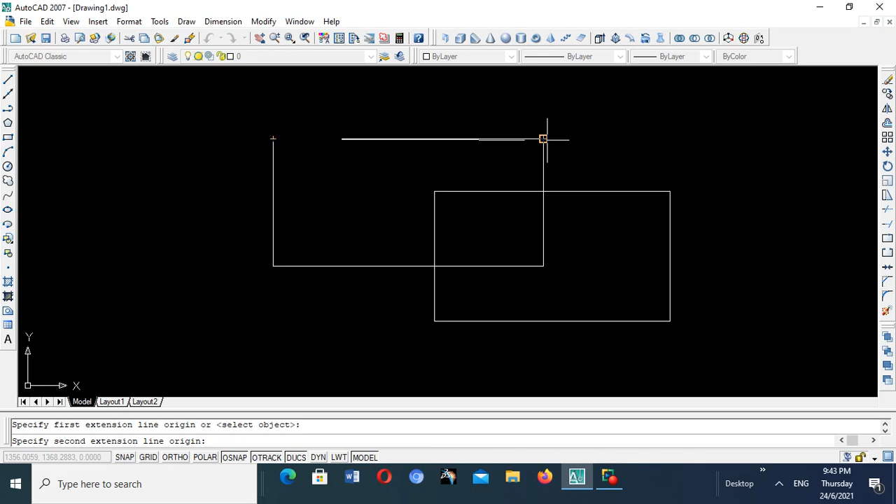When you are dimensioning, you pick this drop-down menu and choose if you want to dimension between a line. Go to its edges, click on linear, and click on the end of the line, two ends, and there is your dimension. See, it's very small. Then if you want to dimension the height, go again on dimension linear, click on the end points of the line. There is your dimension. Very easy.

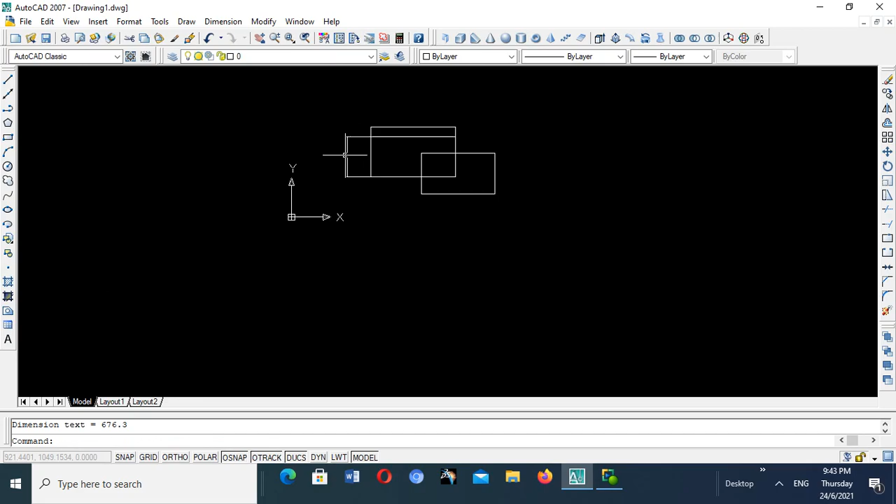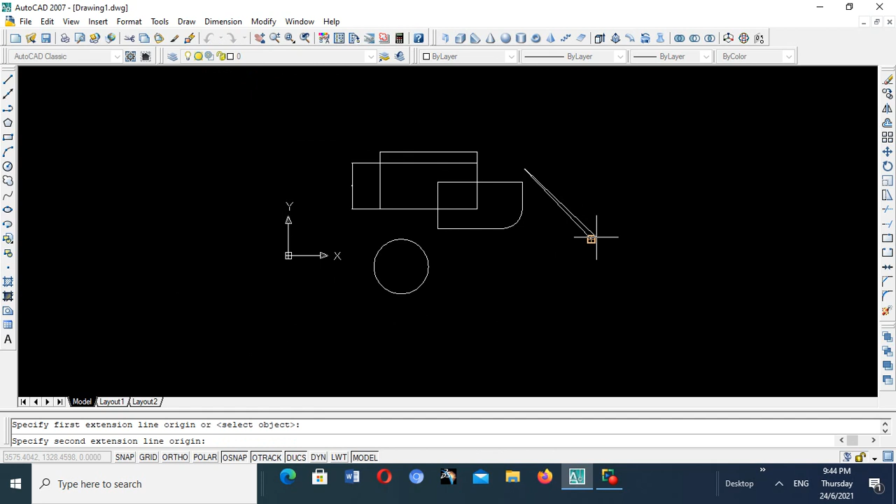So if you want to dimension a non-horizontal line which is inclined like this one, you go to dimension, click on aligned, and then click the end points of the aligned dimension. There is your dimension. See, you have to zoom it to see it, it's a bit small. There's something I want to teach you later.

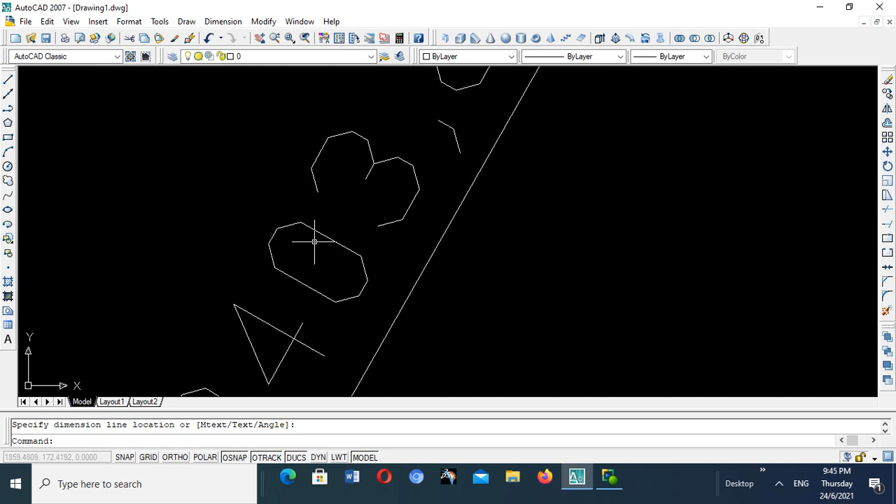If you want to dimension a circle, you go to dimension. You can get its radius, you can get its diameter, you can get its radius. So click radius, then click on the circle. There is your radius. You want to dimension the fillet radius - again you click radius, this is it. There is your radius, 300.

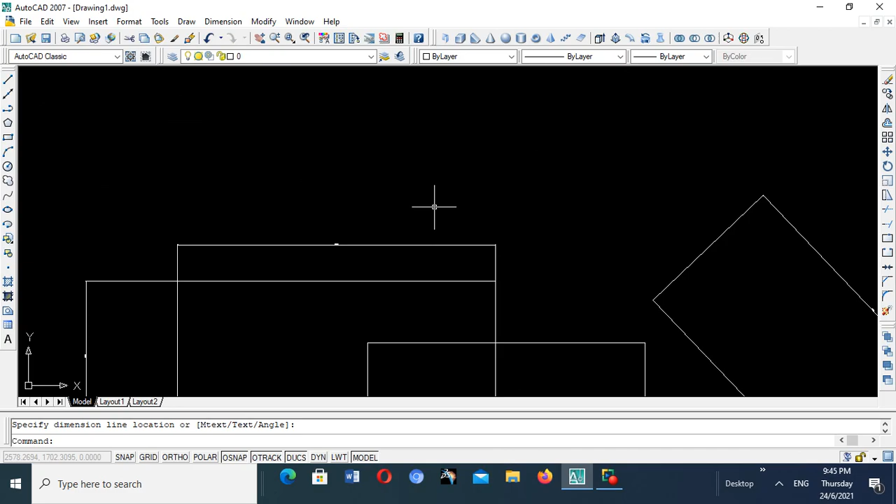Remember, we dimensioned 300. But now you might not be satisfied with this dimension - particularly the text might be too small, the arrowheads might not be visible, the extension lines at the edge might be too close. See, there's a distance. You want to increase the gap between the end point and the dimension end line.

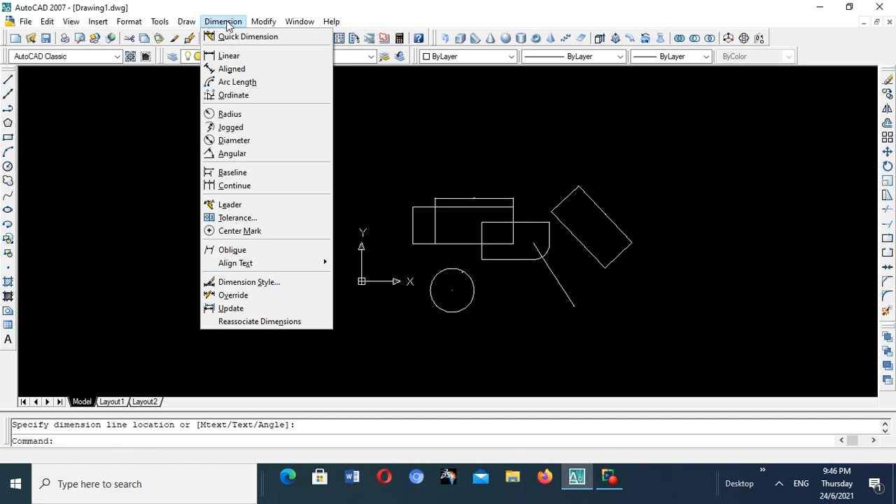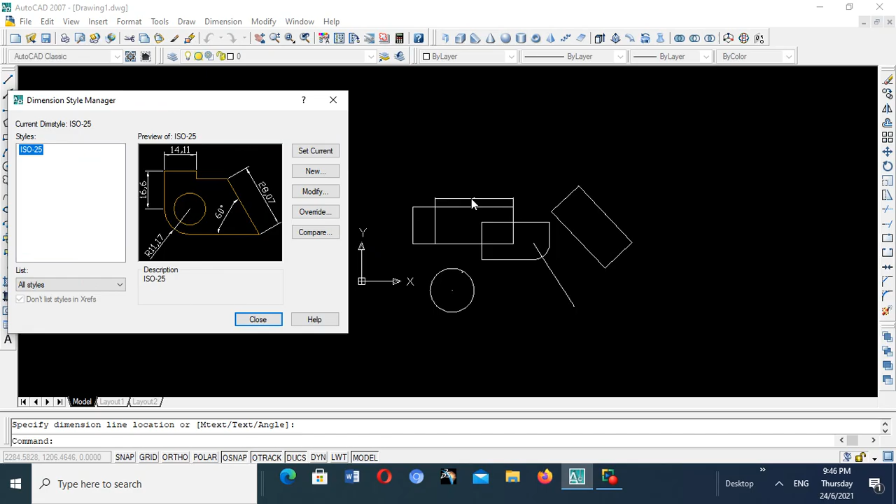So you go to modify, then dimension, then dimension style. Here you will see we can modify certain things like the size of the dimension, the size of the arrowhead, the different aspects of dimension, line thickness. We can modify it, and you will see after our modification there will be a difference in the dimension parameters of our drawings. You click on modify, then here you can modify line, arrows and symbols, text, fit, primary units, alternate unit, tolerances.

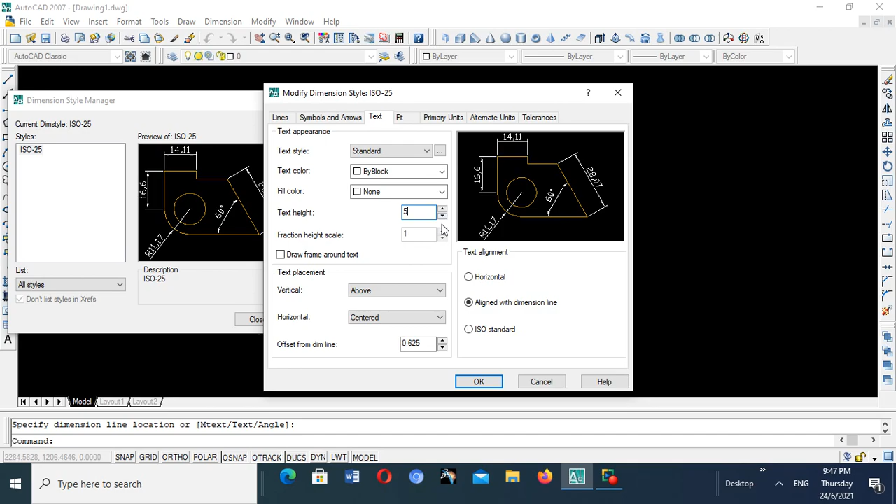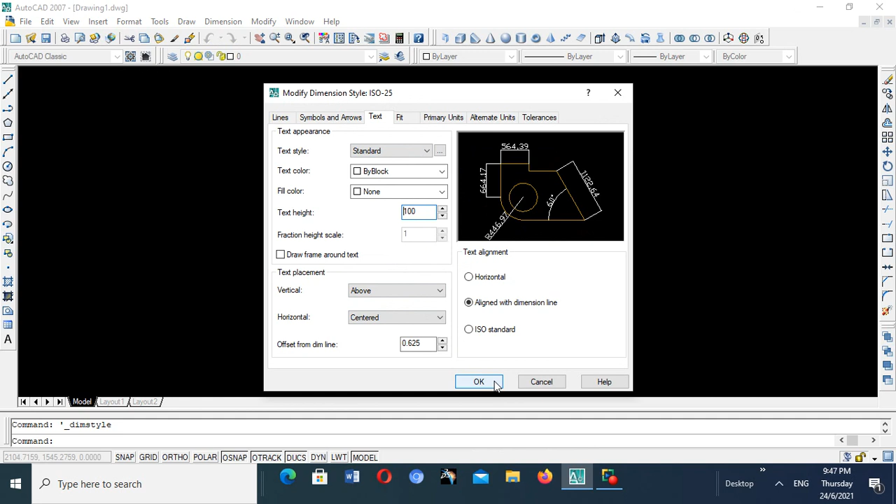I will give you one example, just like this text. So you put text height - I will exaggerate, I will put a text height of say 5 or even 8. If I say okay, and close, you see my text height is changed. Or let me put an extra dimension style - I go to modify, I go to text, I say for example 100, enter, okay, close. See, my text, my numbers, my dimension have increased in text height.

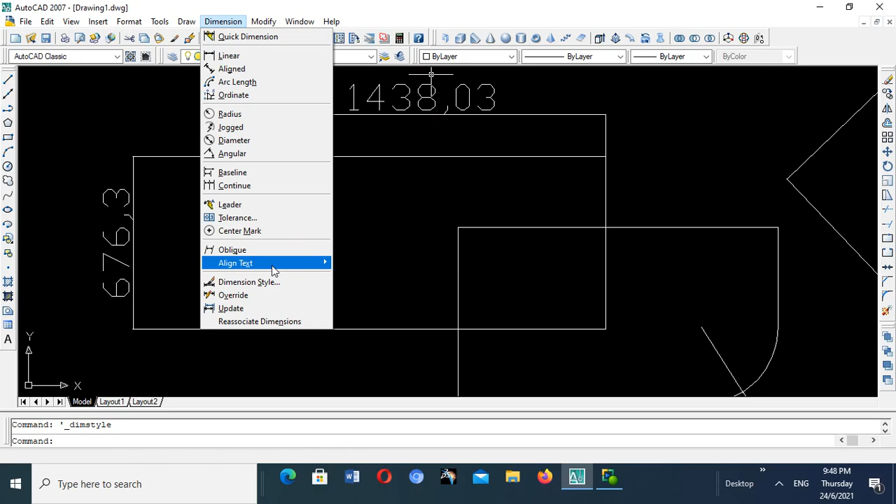I want to change the arrows - you see what will happen to the arrows. We go again to dimension, dimension style, we go to modify, we go to symbols and arrows. You can choose the type of arrow that you want. You choose - so we choose the arrow which is the most used arrow.

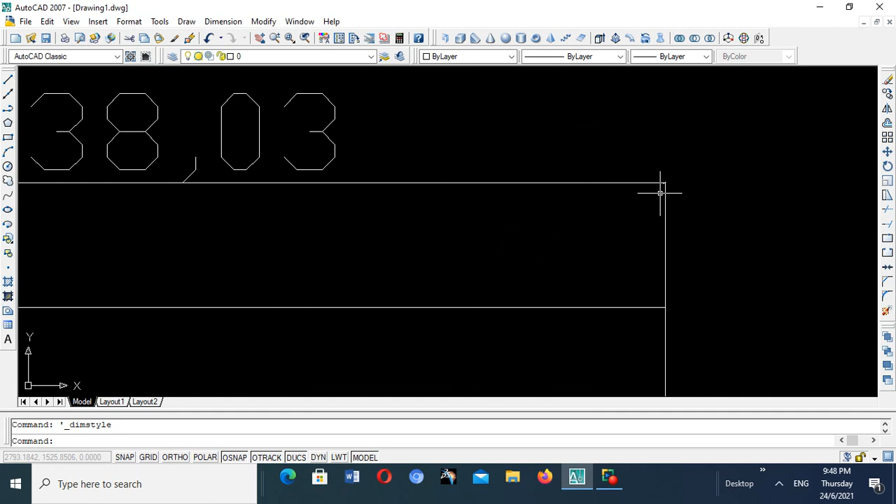Then we change the size. Here is the size - let us put 100 because of the size of our diagram. Because of our limits, our size is a bit on the larger side. Then you say okay, say close. My arrows are not yet visible - I can make them bigger.

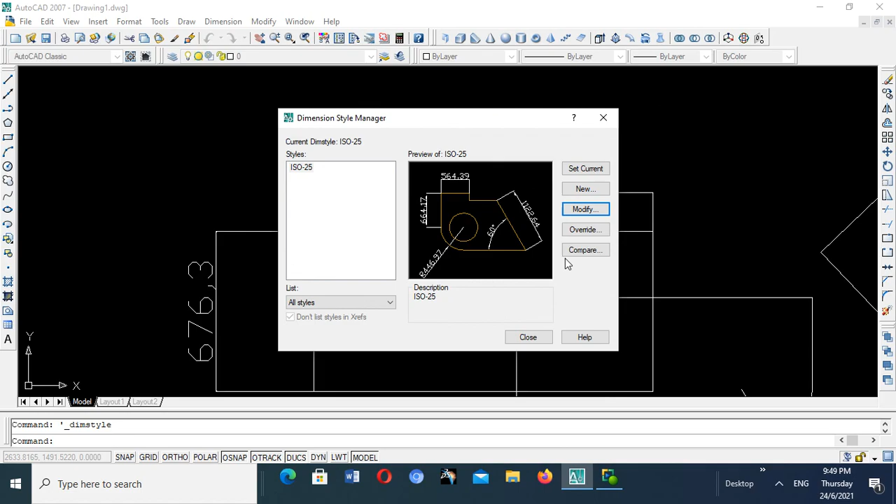Go to dimension, dimension style, I go to modify, and I go to... center marks, no, I've gone wrong. Here is the arrow size, 100. Click OK, you will see there will be a big change. You see, there is my arrow size - it has changed. Why I was doing it one by one, because I want you to see the impact it brings to your drawing by changing a certain parameter of the dimensioning style.

So we go to dimension again, dimension style, modify, and you can change the text - I've shown you the text. You can change the line types, color of the lines. You can change most of these things. You don't want to change unnecessarily - you practice on them, you see their effect.

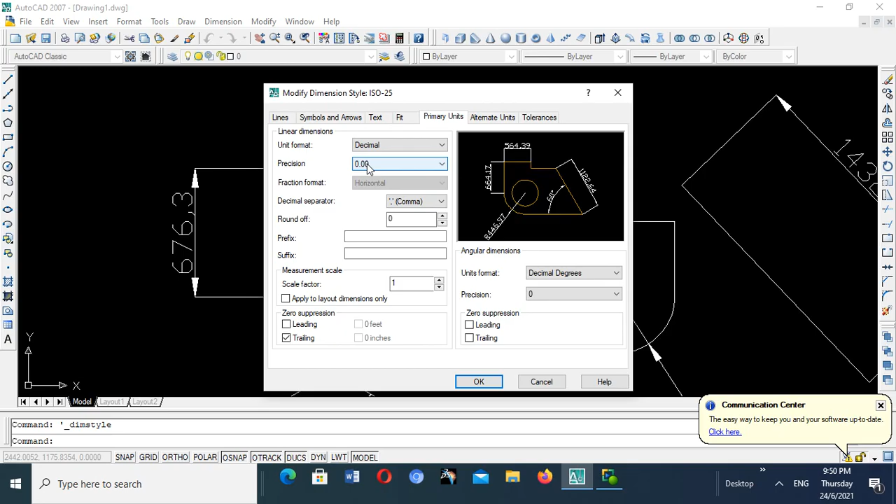Fit, right? And then you can go on primary units. This one you must know. Primary units. You see here the unit is 0.00. It goes to 2 decimal places. If you check in our drawing, it was going to 2. In our case, it is 1 decimal place. We can make it 2 decimal places, or we can make it no decimal places.

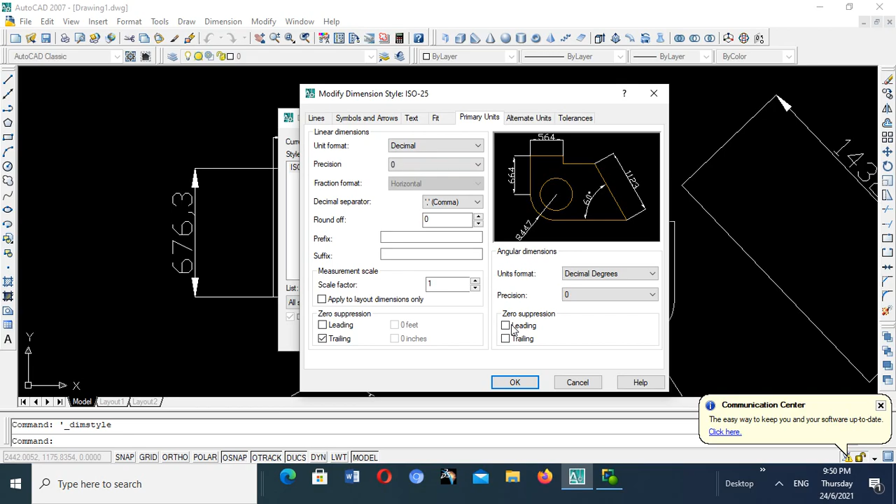You see, the decimal place is removed. If you make it 5 decimal places, it will have more of this. So it depends on what you want. If you want 2 decimal places, it goes. If you don't want a decimal place, you go 0. And if you do that, it will automatically change.

Alternate units, tolerance. If you want your drawing to have tolerance depending on the precision of the measurements. Some measurements operate within tolerance, but when you are going to machine dimensions associated with limits and fits where high precision is required, it is given by some tolerance. Like if you're going to machine a bore where you fit a piston, the fit is critical and it is given a tolerance.

So you define the tolerance, and you define the tolerance method. It can be symmetrical, meaning the upper limit is equal to the lower limit. It can have a deviation, and then you state the upper limit. You say maybe 0.5 upper limit. Then you go to the lower limit. It goes to 0.002 as the lower limit, right? Depending on our primary units, that's why it's not going that low.

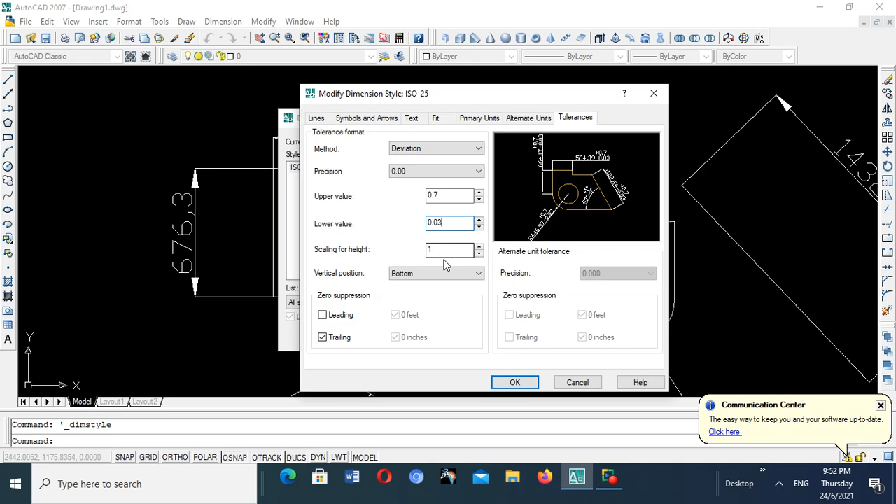So maybe let's go back to our primary units first, and we make them 2, and we go to our tolerance. Here we put 0.03, and the upper limit we make it 0.7. Check what happens. We go okay, close, check. It comes out with what? With the limits, and the limit type is what? Deviation, right?

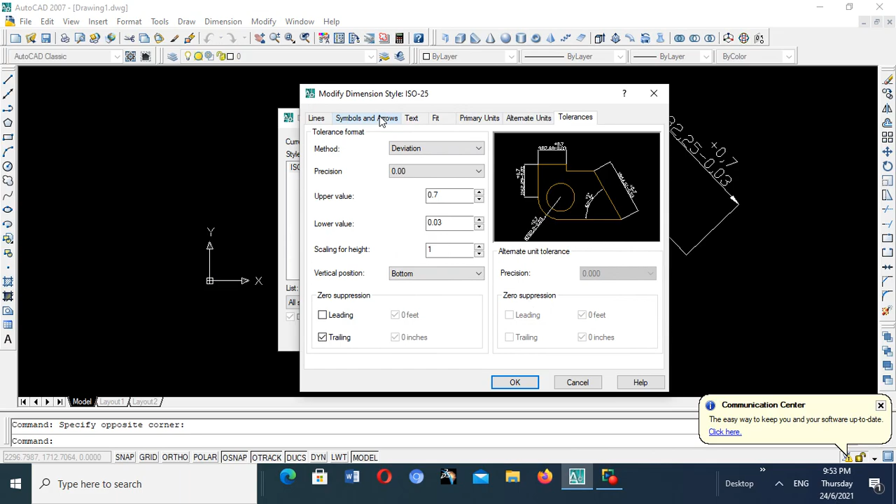Then you can also change the dimension style, you modify. There's something I wanted to show you on text. Good. If you want your text to be horizontal, it goes horizontal. If you want your text to be aligned, it is aligned. If you want your text to be ISO standard, it goes above. If you want your text placement to be above, it is like that. To be centered, like that. To be outside, it's like that.

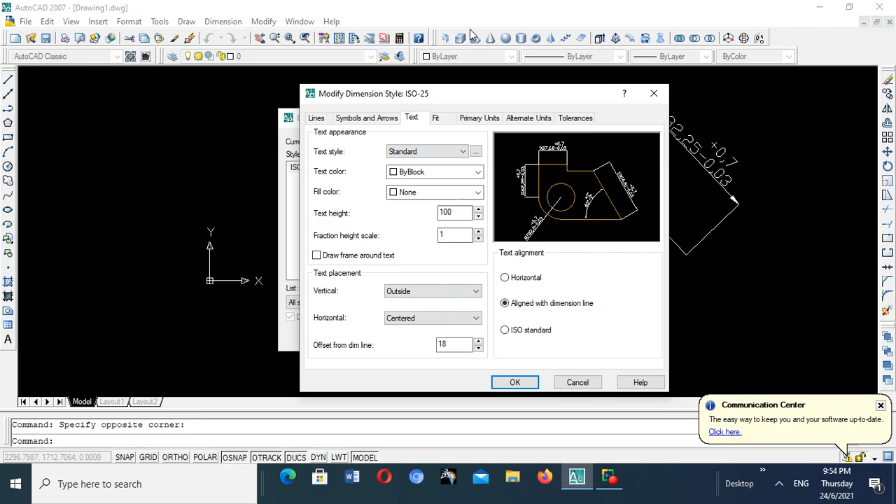Right? Then offset from dimension. You want it to be offset from dimension by 18. It comes out to that. Right? Then there's another interesting aspect of offset. Right. Good. Then ISO standard, horizontal, aligned. Then there's primary units. We've discussed that. Alternate units, tolerances, arrows, lines. Right. I wanted to put this one.

Extend beyond dimension line. See, if you change this one, you say 5. Change this one, you say again 6. Oh, you change this one, I'll make it exaggerated, you say 100. Extend this one, make it 5. See, offset from origin. So this end line of a dimension, you are supposed to extend beyond. This 500 is a measurement from this edge point to that corner there. If we decrease it, you see it will come nearer. You see, right? This is offset from origin.

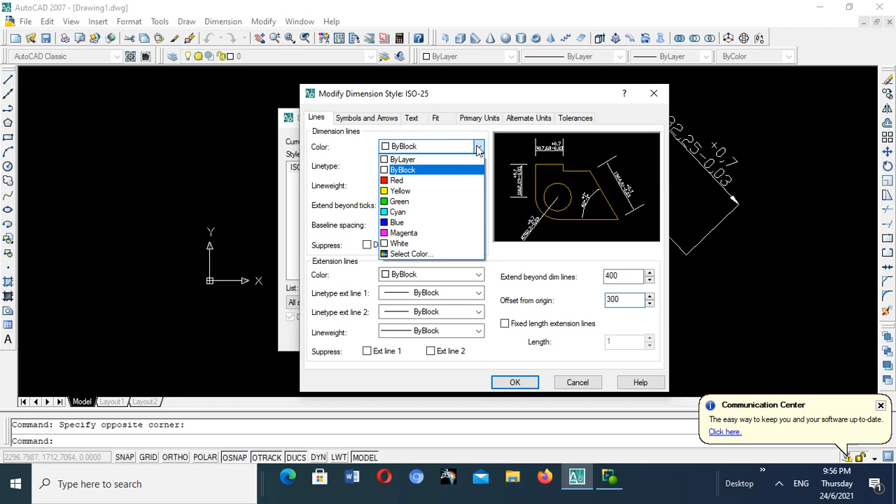Extend beyond dimension line. Put 300, 400. You see, this is the magnitude of the extension line. And this is the distance of the extension line from the point of reference. Right? Then what else do you do? Most of these things you go one by one, you practice them, you see their impact on your drawing. This is line weight. If you put this line weight, it will change your lines to line weight. It will be clearer on the printing.

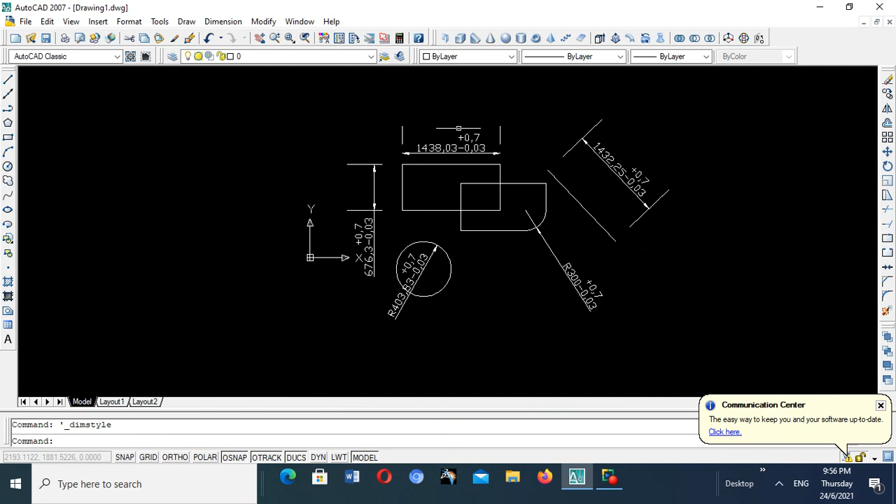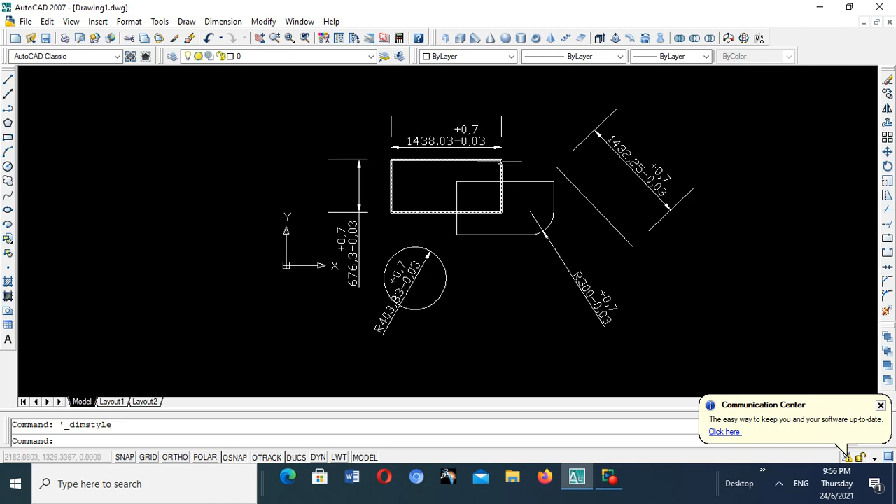So with this, we want you to practice how you can optimize your drawing by making sure you change the parameters that affect the sizes of your dimensions in terms of text height, arrowhead type, distance of this dim line from the end, and so forth. Then your diagram has more clarity and it meets the needs of your customer, or your expected view of the diagram.

Thank you very much for listening. Make an attempt of this. Make use of this to improve your drawing.